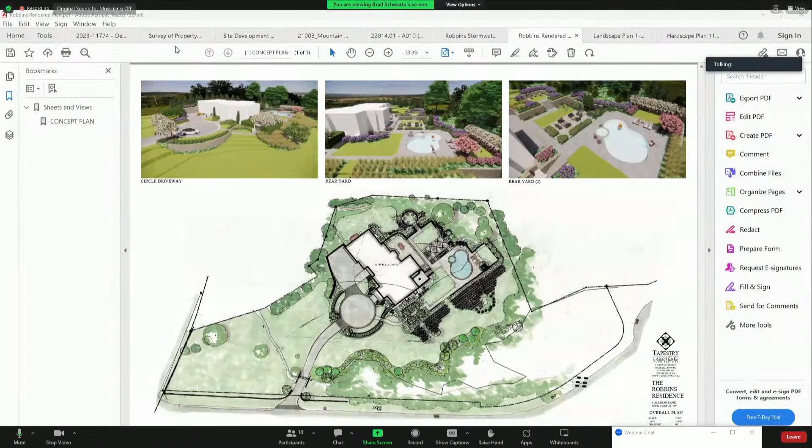As part of this project, we want to add a pathway on the right side of the house—there's currently no access on the left side due to the tall existing retaining wall. This new pathway would bring you to a small garden. You can see in the first 3D graphic the motor court, and how a pathway brings you into the entry, with grading occurring to create a lawn plateau up by the pool so we can have more lawn area in the backyard. A set of stairs set into the slope will connect this new pathway down to the lower lawn woodland area.

There will be no grading occurring in the woodland, and all areas being disturbed as part of this project are currently lawn—they will be returned to lawn and landscaping.

We also want to add a patio in the sunnier portion of the yard by the pool, supported by a boulder retaining wall. That patio requires about a 2-foot variance. The existing patio is slightly over the setback line currently, and we're just trying to center that patio on the interior living room of the house, since there's currently no real design to the patio they have in the backyard.

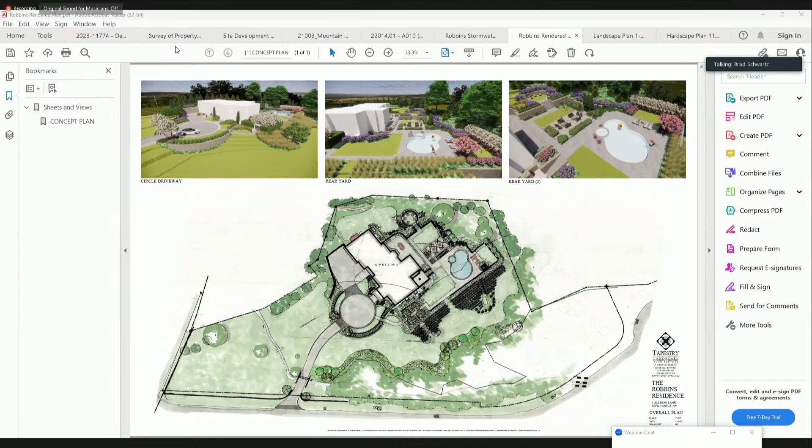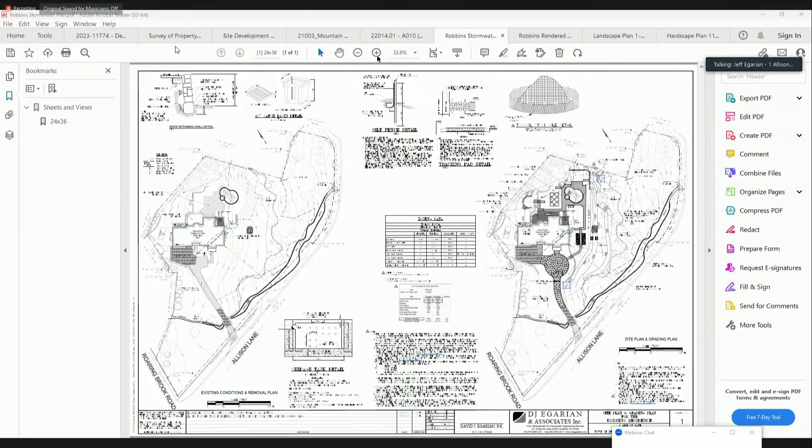Good evening everybody. Quickly I'll touch on the stormwater design. Due to the increase in impervious area in the driveway and in the rear yard, we're proposing to install two 1,230 gallon seepage tanks, one in the front yard and one in the rear yard, as depicted on the plan. For the rear yard, stormwater will be routed via a series of lawn drains and PVC piping into the area as depicted. The driveway is going to be curbed, so all the water will be contained within the driveway area and then routed to the system. Post 100-year hydrographs have been performed, so these tanks have adequate volume to store that increase in impervious area.

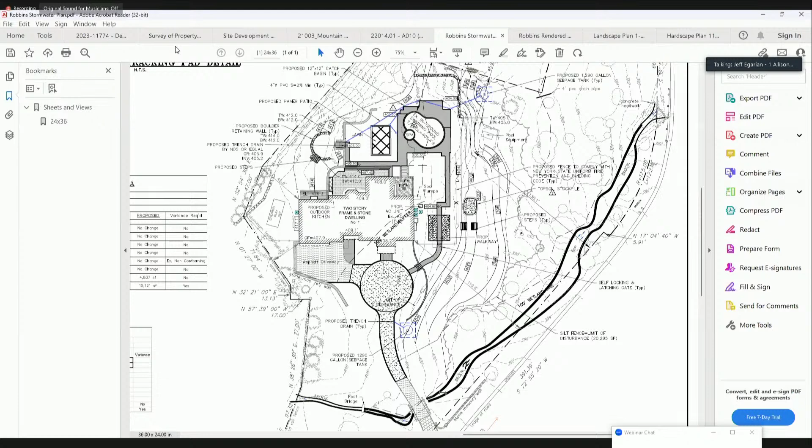Questions, now's your chance. Hearing none—Jeff, thank you for joining. Will do, okay, good luck, thank you. The stormwater design has been passed upon, but it has not yet been evaluated by the town engineer.

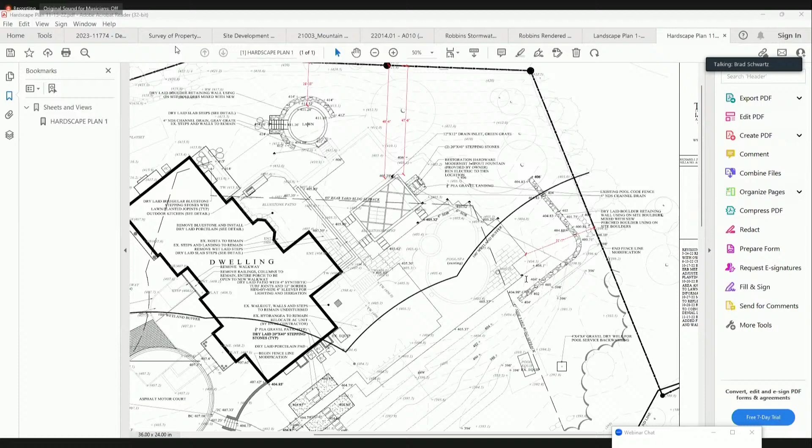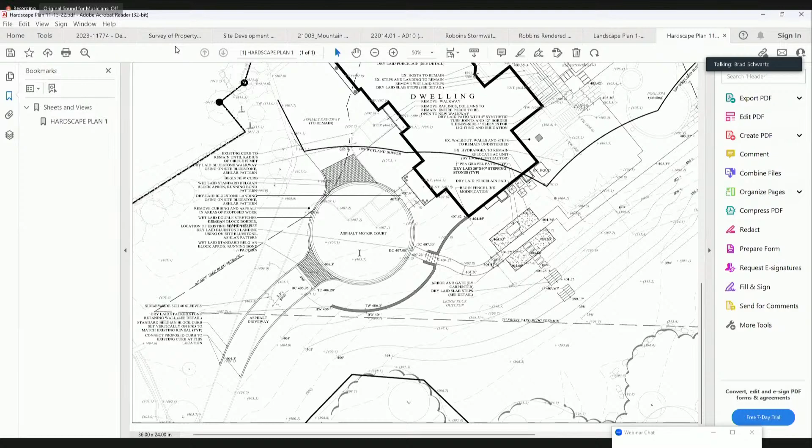So we walked the board through the 5-factor test in our submission letter. Happy to go through the 5 factors if you like, or we can just pause on our presentation and take any questions. Could I just ask on the development coverage, back in October, at the time that the building department looked at the applications, I think that the proposed development coverage was...

14,627. Is it now 15,121? 15,121. So that's a 11% variance as a result of the driveway change. I'm sorry, I didn't catch that, what changed? So the total development coverage is now 15,121. Okay, and that's a jump from 8% variance to an 11% variance.

That again was a result largely of the change by removing the pavilion as the ARB requested and providing the circular driveway in the front of the house. So it was a small increase in development coverage.

But last time you were here, it was a 10% variance, not an 8%, and you went up to 11%. So I think you'd be better if you accepted an only 1% change rather than a 2% change.

So noted. I think also just to contextualize what happened, and I can't speak about it with the expertise that they can, but just as the homeowner in full transparency - we had a draft that included a pavilion.

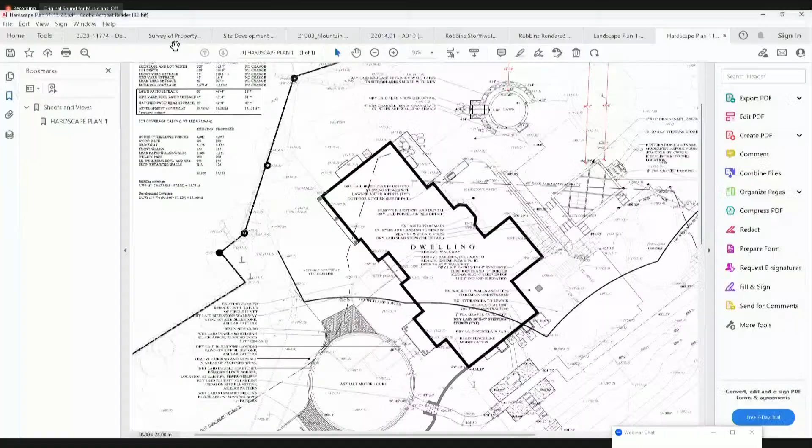So I'm going to share my screen. I'll try to talk a little louder. Okay, you can see it okay? Yes, we can see it.

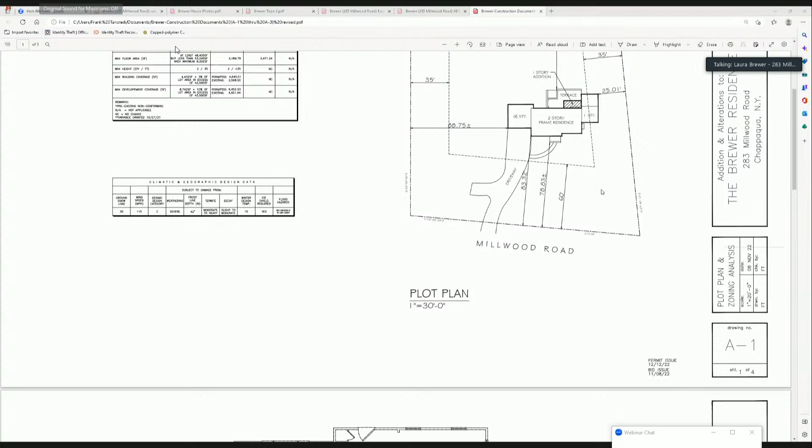Maybe we could start with the applicant describing, in a non-technical sense, what it is she's looking to accomplish? Okay, sure. Hi everyone, I'm Laura Brewer. Thank you so much for having me and taking the time. I love living in my house, and I recently gave birth to a second child.

Sure, you can't hear me? No, we can hear you. It would help if you could speak a little louder, but we can hear you better than your architect. Okay, I'm gonna just shout.

So thank you so much for having me. I'm the homeowner, I love living here. I recently gave birth to a second child, and my family has expanded. I'm looking to get some additional square footage of living space that I can use year-round versus just in the summer. Currently I have a porch that extends across the other side of my family room, and there's a stone patio. Frank is showing it there. I'm looking to enclose that space and make it indoor living space, one larger family room.

Also, we're going to be bumping out the kitchen, but that doesn't require a variance. Correct. Is the room that's being expanded a family room, and the net result will be a larger family room? Correct, yes.

The room currently is a family room with a cathedral ceiling. It's really the playroom right now, but this open porch would be enclosed and serve as a TV room with access to the terrace. This kitchen bump out would also give them a little more room in the kitchen, so they're not crowded around the table, where there's a bay window with a window seat that gets a little tight. So we're going to bump out the kitchen.

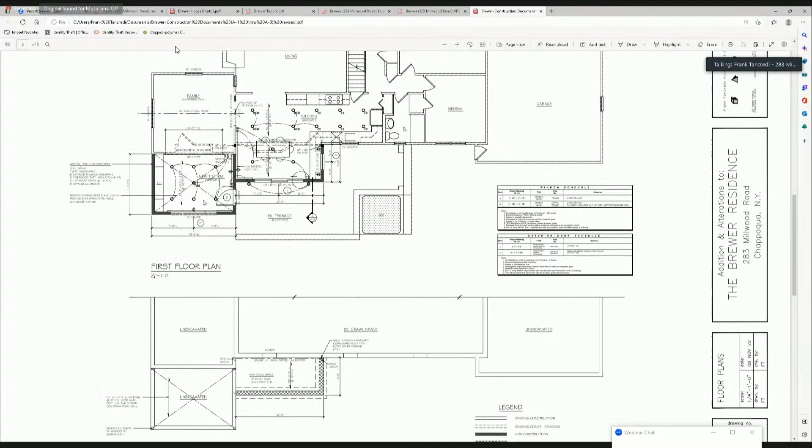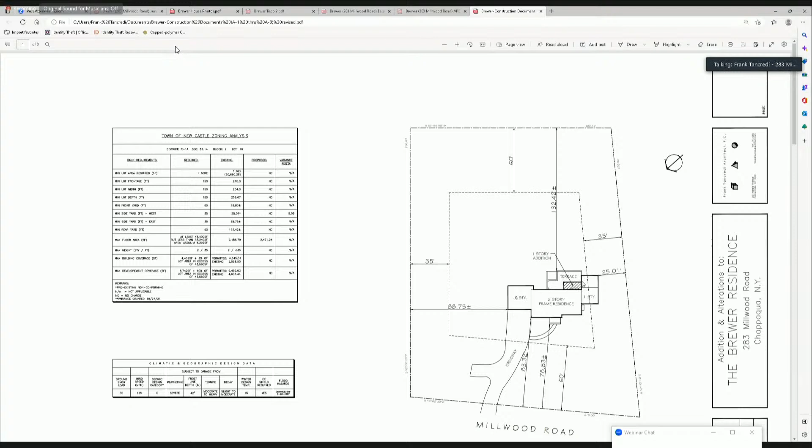Everything is on existing foundation and stonework. We'll put footings and whatnot, but we're not disturbing grade outside of what's already been developed, so there's zero impact on that. It's just unfortunate that if you look at our site plan, the current setback of 35 feet goes about halfway through this room and this porch. So currently it's about 25 feet, and that's where we're asking for a 10-foot variance, because we are changing use from outside space to interior habitable space.

Are there any questions from the audience? No hand. No, okay, thank you.

I make a motion to close the public hearing. Second? Chairman Kenneth Cooper. Aye.

Wait, I think somebody wants to speak. Oh, no, they're getting ready. Let's go on. I think that's David Graham. Oh, that's it. I don't see it.

Could someone mute themselves? We can hear you speaking in the background. No, just the family who's been here.

There's no one else. Chairman Kenneth Cooper, aye. Anthony Giardina, aye. Howard Dubs. Michael Nolan, aye. I'll make a motion.

I move that the Brewer application for a side yard variance of 10 feet to expand a family room in a pre-existing non-conforming home built in 1963 be approved, to make better use of the home, given their expanding family.

There will be no undesirable change in the character of the neighborhood. The benefits cannot be sought through other means. This is the logical location for this expansion to take place. The requested variance is not substantial. There will be no adverse impact on the physical environment, and due to the pre-existing non-conforming site, this is not a self-created difficulty. You'll have 6 months to start, 1 year to complete.

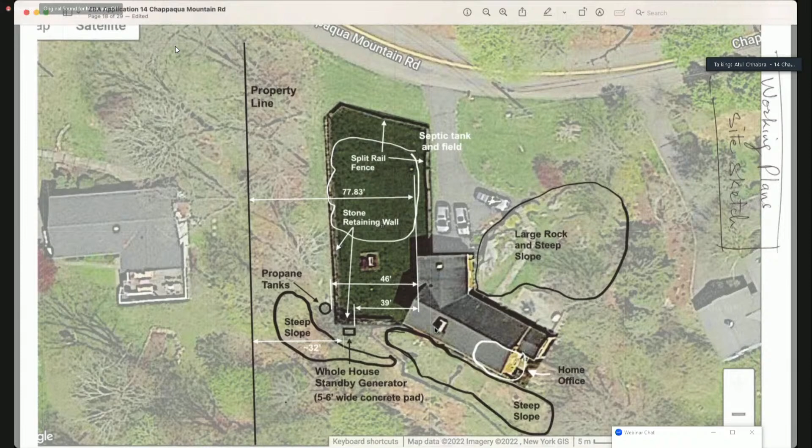They have given me a no objection letter, which is enclosed with my application. Mr. Chhabra, looking at your survey, the generator appears to be some distance off the house. How many feet is it actually off of the house? It doesn't appear that way on the drawing you have up now, but on the survey it looks different. That's because you're seeing the survey on the screen right now, right? Yes.

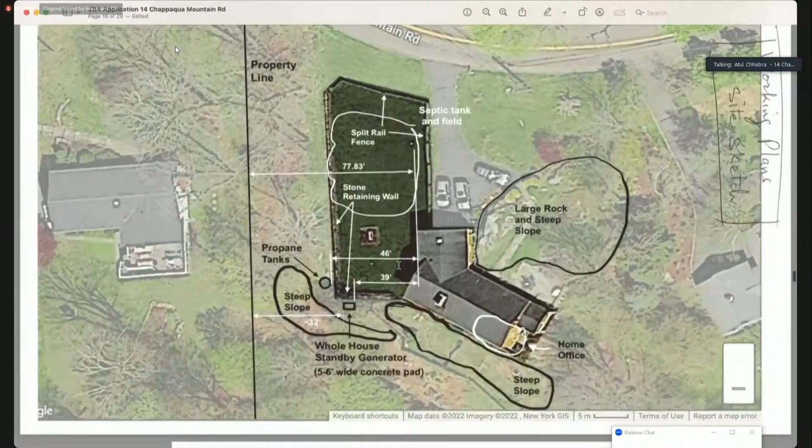Yeah, so there is no stone wall shown on the survey, and that's why the orientation and location of the generator is sort of approximate there. I would request you look at the aerial picture that gives a precise location. So are you saying the stone wall would impede placing the generator closer to the home? Yes—out here is a septic area, and this is a fenced yard where my dogs play. I would prefer not to have the generator on the other side of the wall. It would be much nicer to have it on this side.

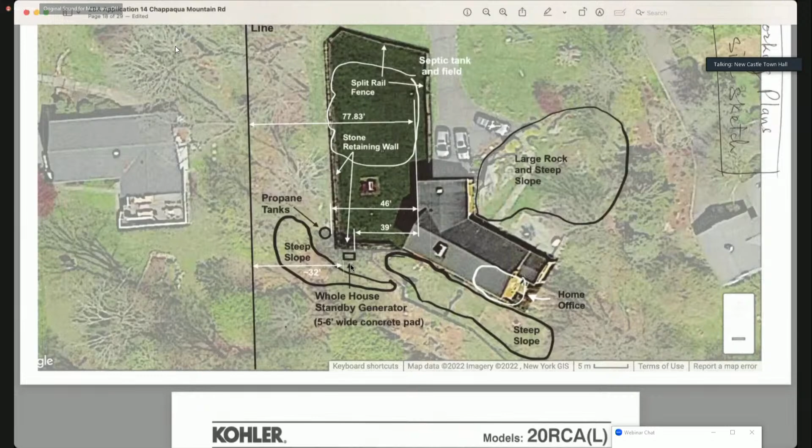Okay, so our concern is to grant the least amount of variance possible. Understood. I just want to be clear—you've placed the generator as close to the house as you can because of these other physical impediments that exist? Yes. Okay. But the stone wall already extends beyond that. I don't know the zoning requirements for the stone wall, but this was done with a building permit many years ago. Yeah, you shouldn't be concerned about that.

Yeah, okay. Is there anyone in the audience to be heard on this matter? No hands are raised. No. Any other questions, board? No. I move we close the public hearing. Second? Chairman Kenneth Cooper, aye. Anthony Giardina, aye. Howard Dubs, aye. Michael Nolan, aye.

I'll make a motion. I move that the Chhabra application for a 3-foot variance for the installation of a generator be approved for the following reasons: the applicant has been thoughtful about the placement of the generator. There are obstructions that make the amount of the variance what it is—it's not possible for it to be lessened.

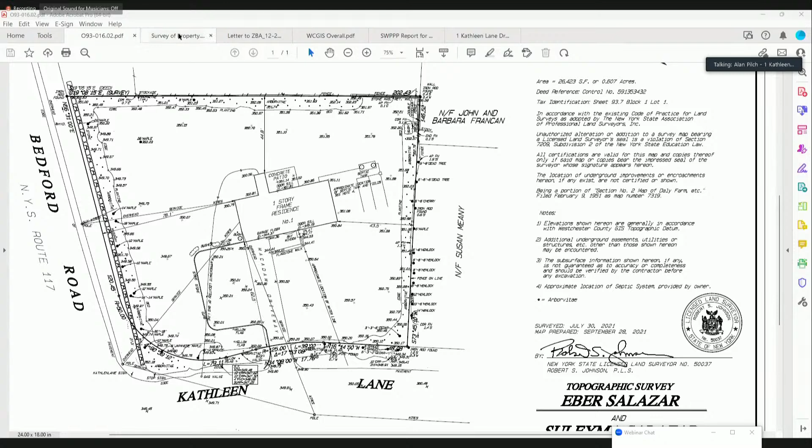The original parking area off the driveway was approximately 15 feet from the front lot line. A plan was put forward by myself as engineer and Jerry Barrett, the landscape architect, to shrink this parking area so that it would be 25 feet from the front lot line. Unfortunately, this is the former parking area, and on the current survey, as you can see, that parking area is 22.9 feet from the front lot line.

Unfortunately, the town code requires that the parking be set back from the front lot line so that it's greater than half of the district front yard setback. Given that the front yard setback is 50 feet, the parking area had to be 25 feet from the front lot line. Now that it's 22.9 feet away, and this parking area is paved with asphalt and edged with Belgian block curbing or stone, we're requesting that the board kindly grant a variance of 2.1 feet for this parking area.

I would like to also note that the prior activity within this property, which is only 0.6 acres, a very small property, was really minor grading - no grading was actually performed, only smoothing of areas to establish a new lawn, and that is what Mr. Salazar has done.

I'll also point out that from my perspective as engineer on the property, for this new parking area in the front line, there's a break in the curbing and a rain garden and a bioretention area, which was designed in the front yard. I did perform deep hole percolation tests, and both were reviewed by Perry Rowe at the town, so he was cognizant of the drainage conditions, which are actually very good in the front yard, and that's the work that was done on the property.

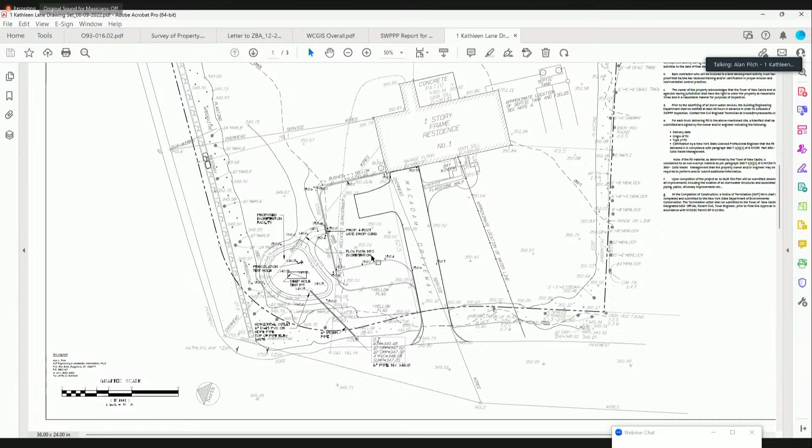Why did the parking area require reconstruction? Originally, this was the original paved area for the parking. Mr. Salazar constructed a new parking area in the front, which unfortunately was as little as 15 feet from the front lot line. The town became aware of it and he was requested to fix the situation. What he ended up doing improved the situation and reduced the amount of parking area and impervious surface, but it did not fully accomplish what the town had requested. It's very close, and it's really a minor discrepancy, extending that additional 2.1 feet closer to the front lot line.

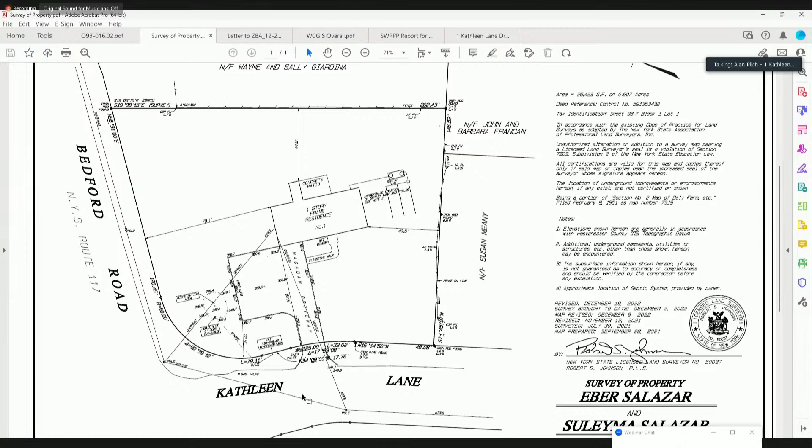There's a lot of new landscaping installed within the property along the perimeter of the front yard, so this proximity of the corner of the parking area to the front lot line is really quite hidden from view from Kathleen Lane. How many vehicles can the parking area accommodate?

I believe about 3 vehicles is what's typically parked there. There's only one car garage here too, which is kind of small.

When was this constructed? It's only 3. When was this constructed? In 2022, last year, even as late as during the fall.

So Mr. Salazar was aware that it had to be 25 feet from the road, correct? He probably was, but I believe the contractor had not constructed it to that distance.

I don't know if Susan Meany is present to be heard on this matter, but are you aware of her comments about the scope of the construction and the work that has been going on?